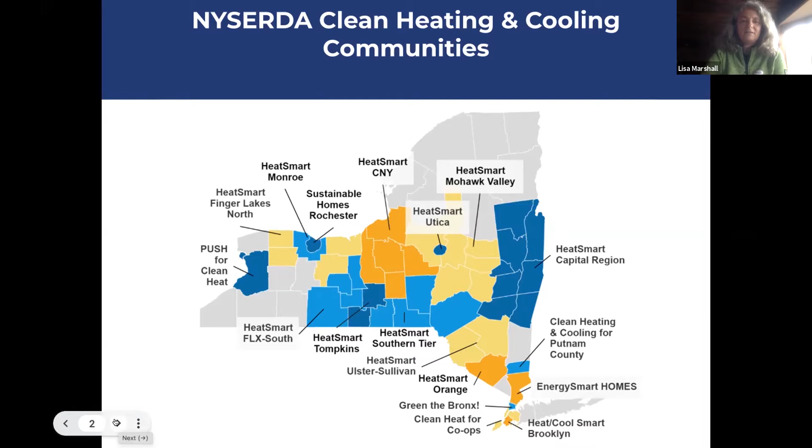But why is such a thing as a clean heating and cooling or HeatSmart community program even important? Why do we need that? The reason that we need it is because we find ourselves in what some are terming the climate crisis or the climate emergency here on our spaceship planet Earth, where we rely on this blanket of gases in the atmosphere to keep life livable and comfortable for us and all the other species we cohabitate with here on the planet. And unfortunately, things in that atmosphere are a little out of balance.

The reason for that is that for the past 200 years, since the onset of the Industrial Revolution, each year we burn more fossil fuels than the year before, putting more carbon dioxide, methane, and other gases into the atmosphere. So that lovely blanket of atmospheric gases is getting too warm, which is causing all kinds of problems that you all probably know about: extreme weather, sea level rise, et cetera. So it's very important that we figure out how to reduce emissions.

Here in New York, we actually have a law that requires us now to reduce emissions from all the sectors that produce these gases. That law is called the CLCPA, or Climate Leadership and Community Protection Act, and it requires us to reduce emissions pretty dramatically, which is quite exciting. This is a nation-leading law.

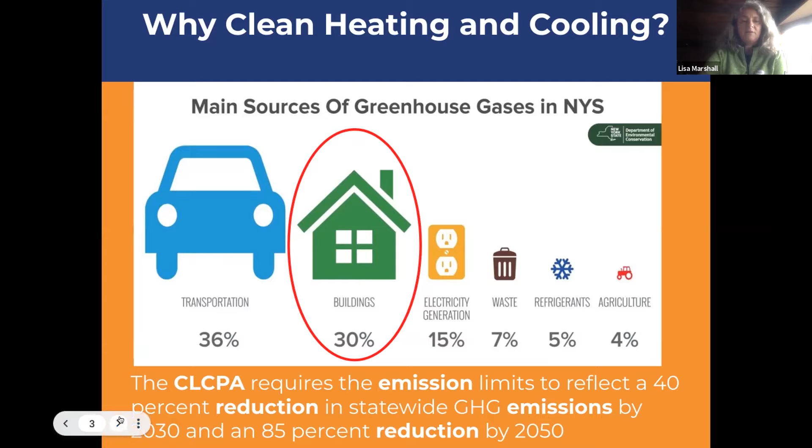So how do we do that? Well, we have to look at how we use energy in our buildings. Here in New York, although it's been a very warm fall so far, we are a heating dominant state, and heating is the main way we use energy in our homes. It accounts for more than half of the energy used in the house. So thinking about how to heat more efficiently is super important.

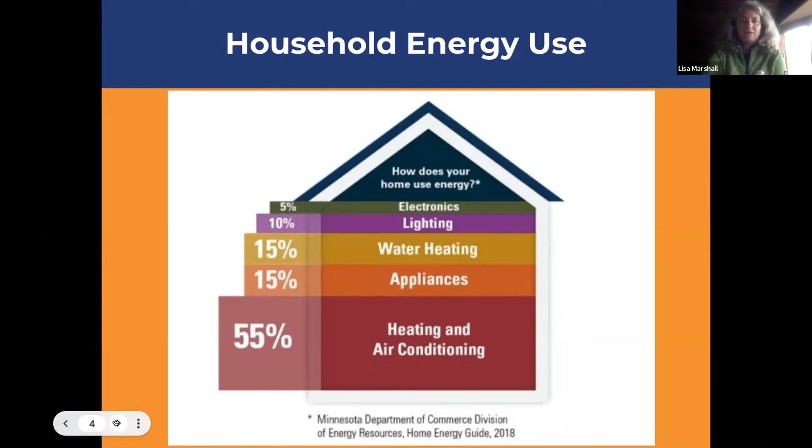So we have several recommendations for people starting to look at these things. One is to first have an energy audit and take a look at the insulation and air sealing that keeps heated air, or cooled air in the summer if you use air conditioning, inside the house with you, instead of letting it escape out the window, through the roof, through recessed lighting, or out through the foundation. That's where heat often escapes and cold air seeps in. So it's important to look at your building envelope, as we call it, and have your house weatherized—weatherization being a blanket term that covers insulation and air sealing.

And then the main thing we talk about at HeatSmart is heating, and we have recommendations for that too—the wonderful technology known as the heat pump, which is super efficient because it takes heat from the surrounding atmosphere, from the air or the ground, and moves it around so you can use it in your house. Because you don't have to create that heat, you just have to move it around, that's where all the efficiency comes in. There are two basic types, air source heat pumps and ground source heat pumps, and we'll talk a little more about those.

That same heat pump idea can be used to heat your domestic hot water. These are all much more efficient ways of delivering heat to your home or building, not producing it. And as an added benefit, they also provide cooling, air filtering, and dehumidification. So heat pumps are just great little things to have.

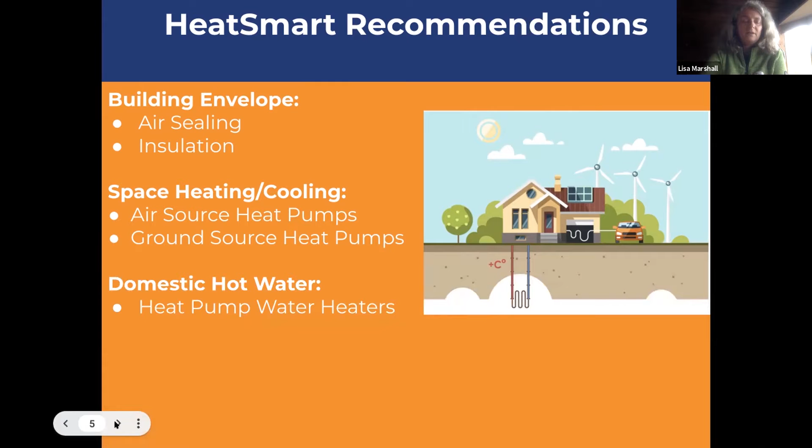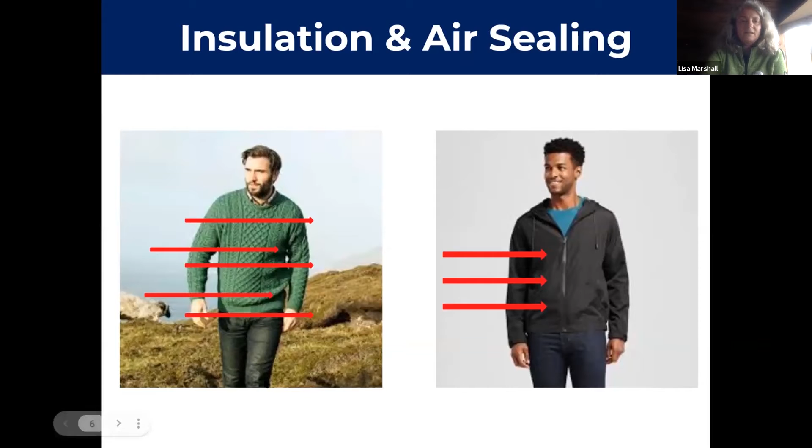When I talk about insulation and air sealing, I like to show this graphic. Insulation is like this warm sweater here on the left, a nice warm wool Irish sweater. But when the wind blows, that sweater, even though it's warm, can still let cold air in. Anybody who's walked outside on a cold day wearing a warm sweater might have felt that freezing cold air hit them right in the belly. So it's still not adequate unless you pop a windproof windbreaker on over the sweater, like this fellow has on the right. That represents the air sealing that seals up the cracks and keeps cold air from leaking in, which can happen in a lot of places in your house, around windows, joists, electric outlets, etc. Those are important things to have evaluated and fixed if possible.

When you move the refrigerant through the system and put it under higher pressure, it condenses and gives off heat. This simple physics is what keeps the inside of your refrigerator cold, but it can also be used to heat or cool your whole house.

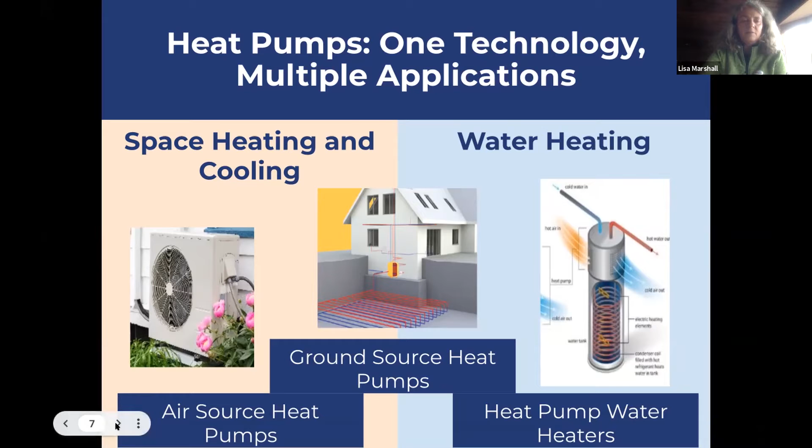There are incentives, grants, rebates, and tax credits that apply to all these different technologies, and HeatSmart and your installer partner can help you access those and find out what you qualify for.

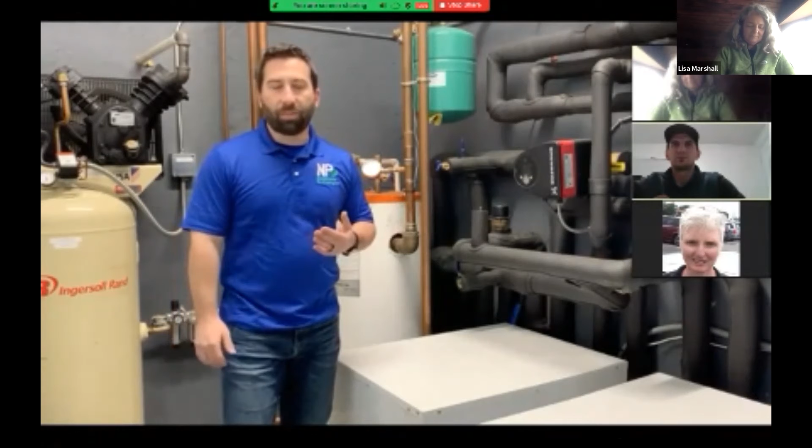Because when you're investing in geothermal technology, you're not only getting the benefits of cost savings, average savings is about 60%, you're not only getting the most comfort that you can achieve from any system, but you're also getting something that lasts forever. And when you look at this technology and what it does for the environment, the reduction in the carbon footprint, the benefits are just through and through. And you look at today and you look at the condition of this planet and you look at society, this is truly the best technology for the future.

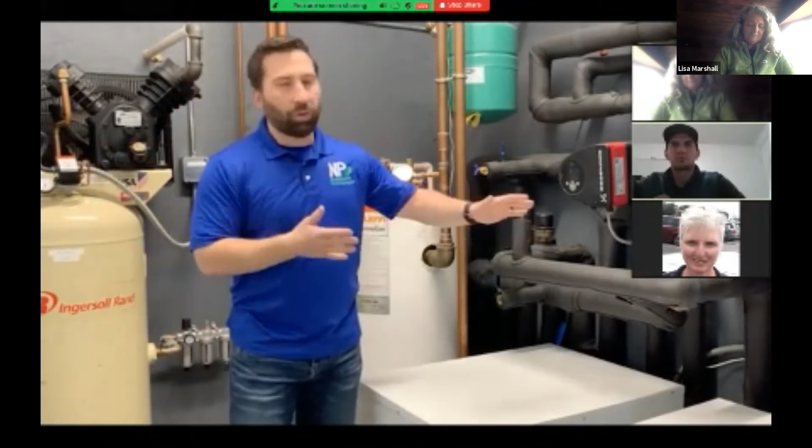And when you talk about HeatSmart programs, promoting these technologies, looking at heat pump technologies, we've been there since the beginning. I remember back before HeatSmart programs even started, we were trying to do community gatherings, educational type events, but we didn't have much success with it. And now you're starting to see great success, and heat pumps are starting to take hold like never before.

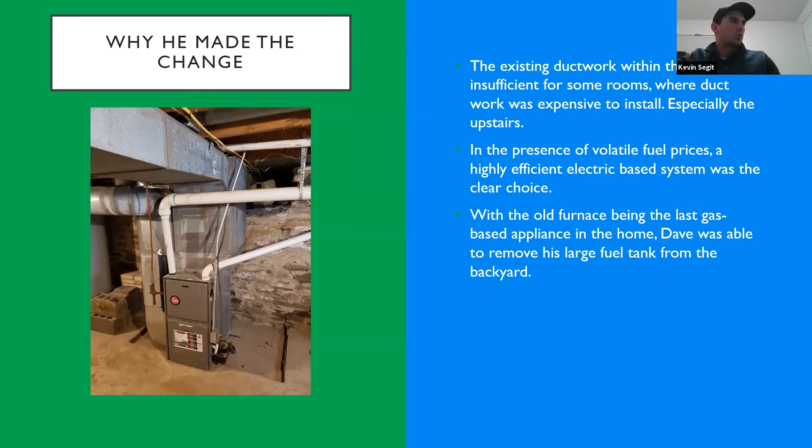Now the second floor had 3 primary bedrooms, and those were all covered by this outdoor unit, feeding 3 ductless mini split heads, high wall mount units, in those 3 bedrooms. So where the ductwork wasn't able to provide adequately for the home, we were able to cover that. That's a common solution I like to practice on some of these older houses - it tends to work out great. It saves the customer money where they don't have to buy too many units for the downstairs, and they can take advantage of their existing ductwork, but still get the improved comfort with those wall units around the second floor where they're needed.

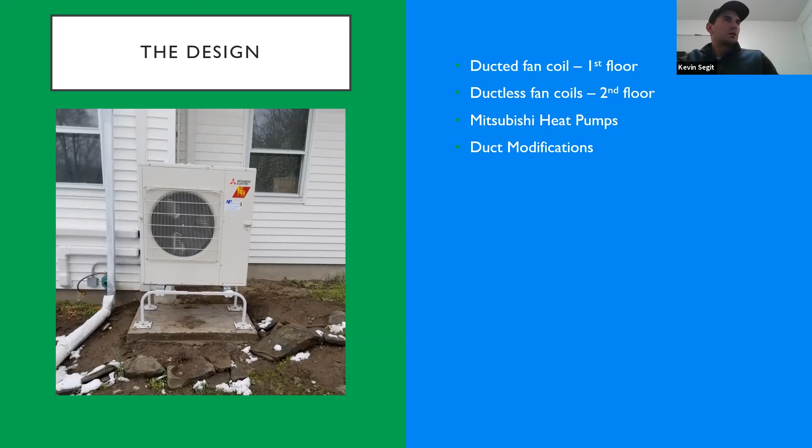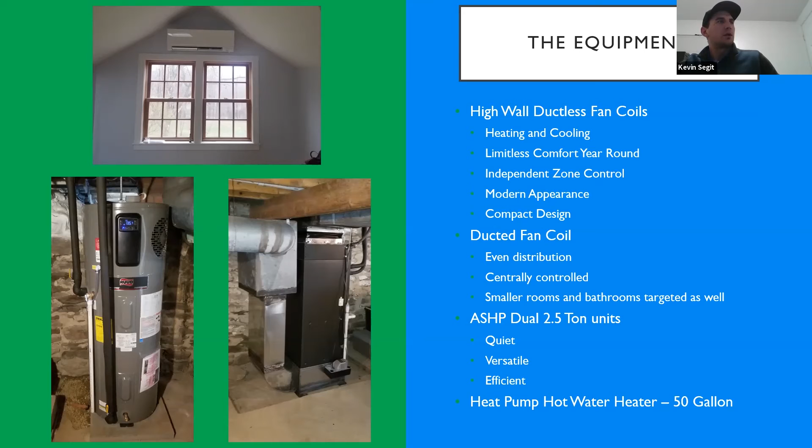And then, of course, on the bottom left, there's the heat pump hot water heater. After we were able to tighten up that basement, it had sufficient air volume and was going to maintain a good temperature down there to run that at a good efficiency and save a lot of money there. All of the Mitsubishi equipment we install is very quiet, very efficient, and good quality with a good warranty. They last a long time with minimal issues - they're great products.

So here's the results of the system. There's another photo of the front of that forced air unit and the new ductwork. I didn't really elaborate too much on the insulation here, but you can see some of it bleeding over on the right side of the photo. That's a crawl space, so we did an encapsulation there, and also some insulation in the attic parts. That's going to make huge improvements to the heat load and the comfort of the home.

Shouldn't have any cold floors anymore, and big cost savings too. So total cost of the system was $26,150. Those numbers aren't too reflective of current prices with the increase of everything in the last year, but that's what it was at the time for all that equipment. The breakdown was basically, I'm not sure, I should have shown that breakdown, but typically it's like two-thirds came from the grant and about one-third came from the rebate that everyone's eligible for.

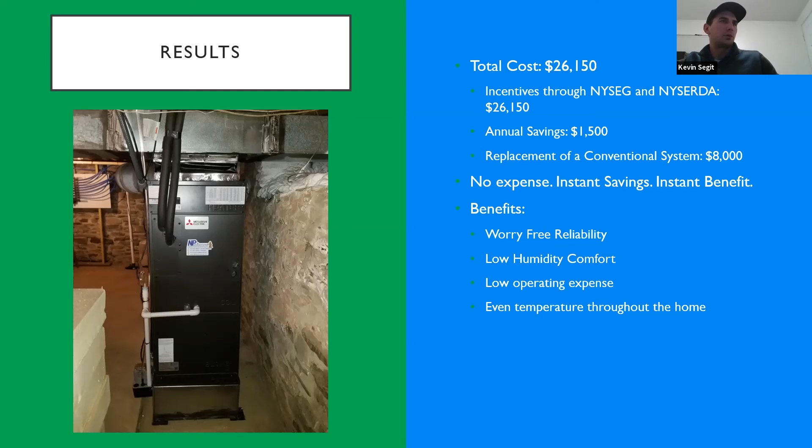Annual savings expected from the HVAC system alone was $1,500, and I expect with the insulation upgrades it would actually be a lot more. And of course, to have otherwise replaced that propane system probably would have been looking at about $8,000, so we saved some money there too. No expense to the customer, instant savings, instant benefit, worry-free reliability. And now he's got the benefit of air conditioning, dehumidification, high efficiency heating, even temperature throughout the home. Much better system than he was working with before.

And that's what I have for today. So I'm open to questions at this point.

Thank you for listening, that was great, Kevin. You want to unshare your screen so we can see each other? There it is. And so the only thing missing from that was you forgot to introduce yourself.

I'm Kevin. I'm a field engineer at NP Environmental. I work in doing the home assessments. I do the quoting, the contracting, the project management. I'm the guy start to finish.

Yeah, and Kevin was brought on a couple of years ago and has really stepped up to be Nick's right-hand man for at least the HeatSmart program projects. I don't know what happens with the other projects, but we're working on Kevin to sell himself too, because he forgets that part.

So that was a great project. You said, Kevin, that it was one of your favorite configurations for an air source heat pump system. You want to talk through what some of the different options are and why this one was one of your favorites, and then we'll take questions from our guests, but I wanted to hear more about that.

Yeah, that was really one of the main points that I wanted to make and kind of why I chose this system, because I love being able to offer that solution. So with the air source heat pumps that we offer from NP Environmental, there's a variety of different outdoor units to select from. Each system is comprised of outdoor units and indoor units.